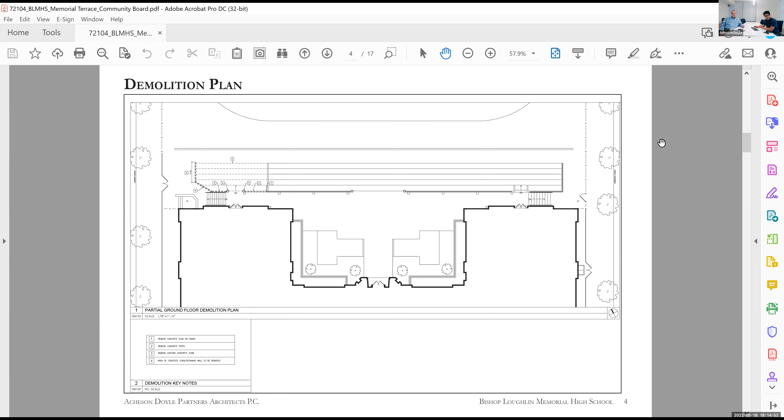Looking at the existing conditions, on your right-hand side from Clermont Avenue, you're looking at the proposed bleachers and the area in which we are proposing existing bleachers and proposing our new ramp. On your left is looking from the paving out onto Clermont Avenue. To give you an idea, to your north is Lafayette, to your left is Clermont, and to your right is Vanderbilt. We are proposing removing a portion of the existing bleachers and installing a new ramp within that area.

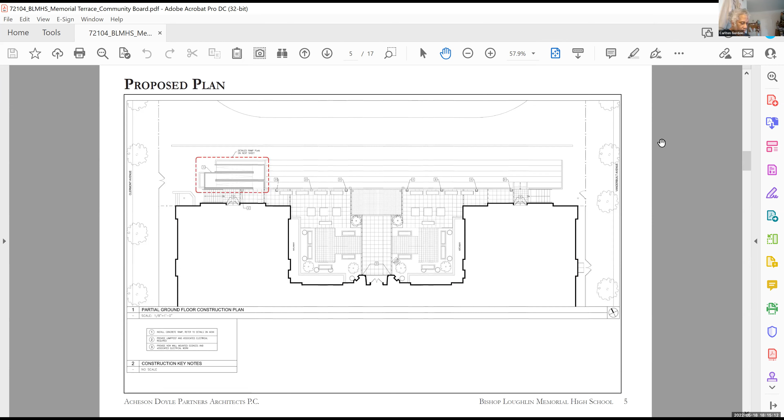The red dotted area is the only new construction, so to speak, that is visible. The paving, the upper level that you see with the benches and the paving, that's all on the ground. The ramp will be planted to make it seem more diminutive from the street view, but the work is confined to areas within the field, and it's not going to increase the constructed area.

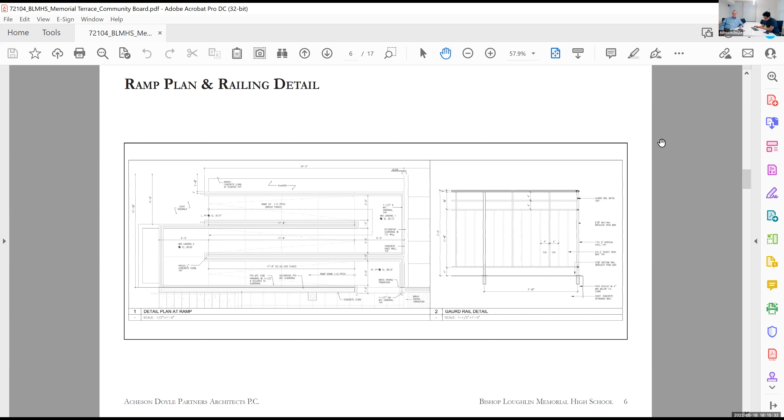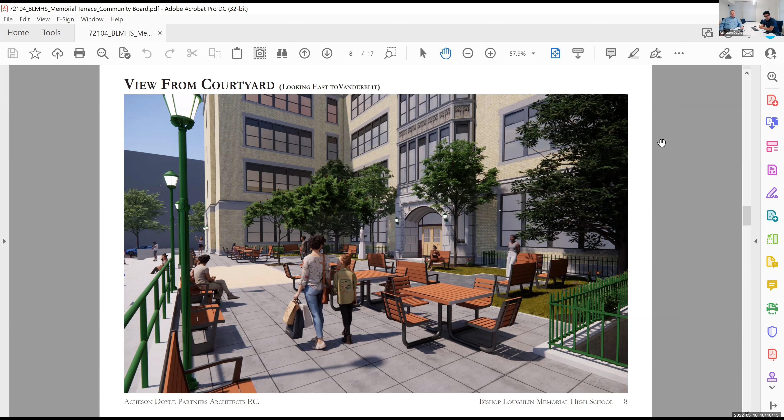This is a view coming up from the ramp, looking at the paving, which is already approved at staff level. We do have some existing lampposts that we'll show you in a bit, which we are proposing to salvage, introduce electrical to, and put new lights at the top, just for site lighting and security.

Just as an aside, the brother Dennis Cronin, who's the president of the school, is a nut about the landscaping. These trees are existing, and an arborist is coming now that the construction is getting ready to begin. They're going to trim these, feed these, and enhance the landscaping up there. It's a really nice little oasis.

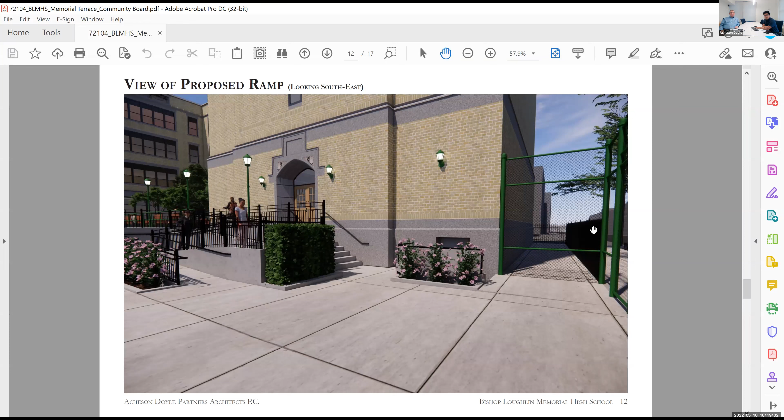So the current main entry is directly from Clermont, and that's where all the students come into the building. The students, as you probably know better than us, hang out on the athletic field and the bleachers after school and before school. So it's a meeting place, and a valuable part of the program.

This is a view from Clermont Avenue showing how our planting is going to obscure the ramp, as well as provide a more open entry sequence to the courtyard and into the building.

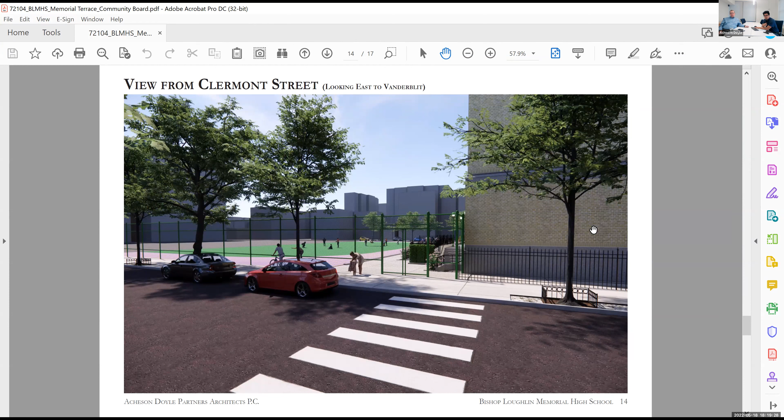We will also be introducing new wall lights at each entrance to provide site lighting for nighttime, and these lights will be connected to a photo cell, which will automatically turn on at night and turn off in the morning.

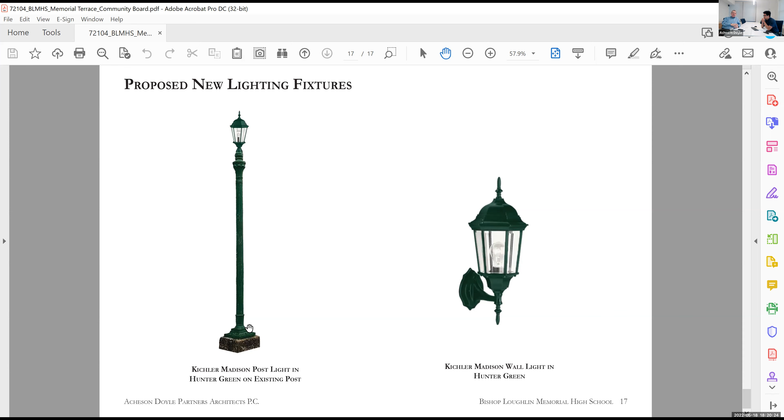Committee members, I want to point out, go back to one of the universal renderings. The school is an independent school under the original auspices of the Diocese of Brooklyn, but it doesn't function as a parochial school or get any funding from the diocese. So they work off tuition and fundraising, and that's why it was a big ticket item to do the restoration of the exterior, which has put it in very good shape, we think, and this will just further enhance it.

But the school is here to stay. They have a great student body. They're very successful, and they want to be a good part of the community, which is hopefully evidenced here.

Just as a total aside, I can tell you my father went to this school, my late father, and my mother went to Bishop McDonnell, the sister school, which is now tied into this institution through the alumni. That's who the courtyard is dedicated to, and it's been very good for their fundraising, frankly.

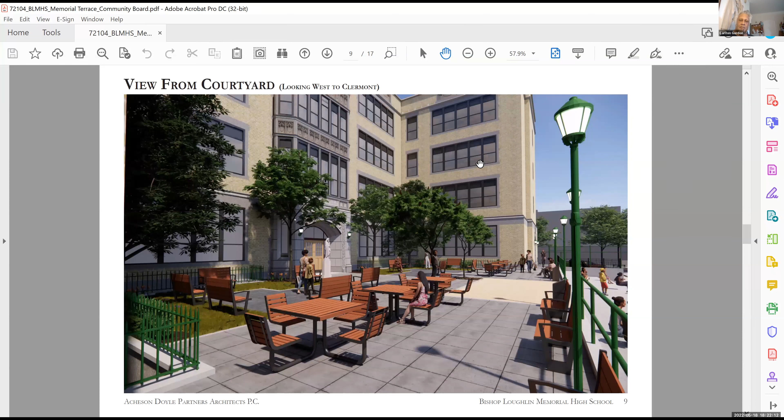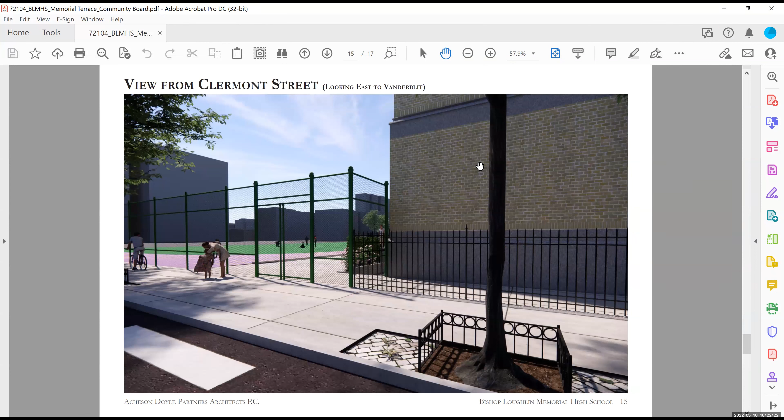Yes, can you hear me, Colton? Yes, I can hear you well. Okay. I have 3 letters, from Society for Clinton Hill, the Fort Greene Association, and also from Citizens for Responsible Neighborhood Planning. They reviewed this plan and had no objection to it.

However, their concern was the proportionality regarding the lamp to the pole, and that the lamp seemed not to comport to the character of the building, to the architectural structure. Apparently the architectural structure is late Tudor, I believe, if you look at it, and the lamp is a later period, almost a colonial sort of lamp that's out of proportion to the pole itself. Can you speak to that?

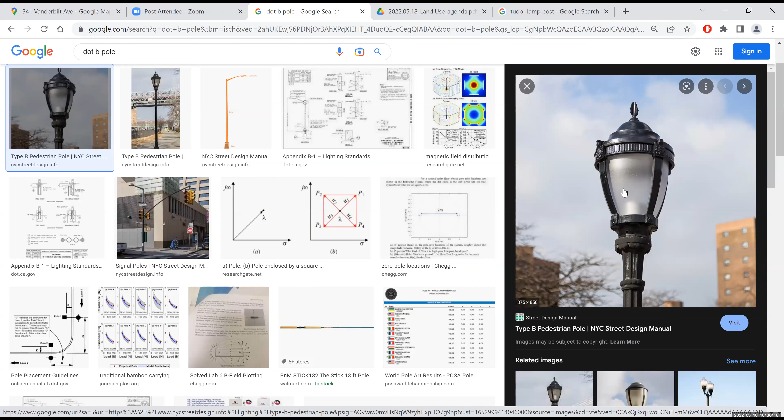Yeah, so are you open to that? Yes, we're absolutely—I know exactly what you're talking about, we're just having trouble finding it, but I know it. That's it, on the upper left-hand corner. There you got it, yeah. That's the type B pedestrian pole. Yeah, that seems to be more appropriate for something. Entirely appropriate, done deal. Great, we're happy.

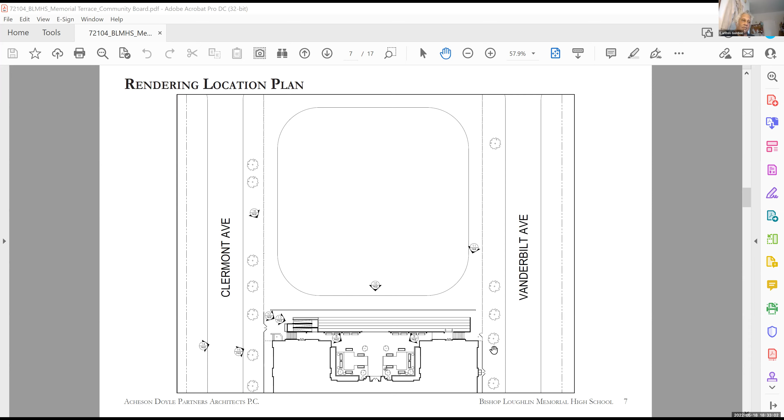Understood, thank you for the explanation. Next person on my screen with a hand up is John Doe. Alton, did you call me? Yes, go ahead, thank you.

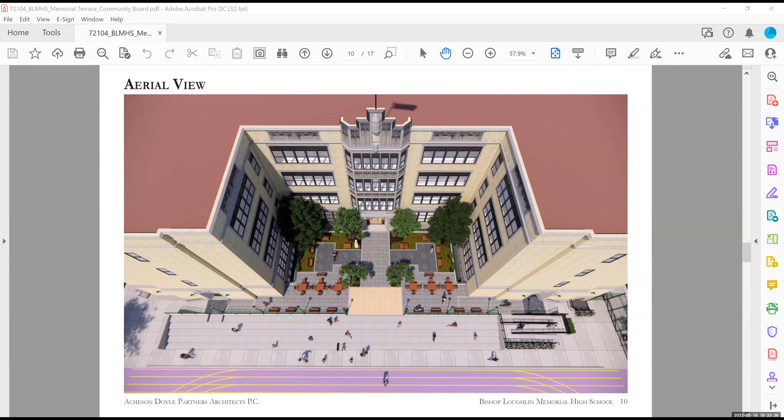My questions are not necessarily related to the appropriateness of the ramp. Could you give us the cost of that particular ramp installation? That's one question. The other question, again, is not related. Are you aware of other schools in the district that do and do not have ADA access? And I'm interested in the larger picture. This is not necessarily your responsibility, but ADA access is important. So are you working with a knowledge of what's going on in the community, or are you just focused on Bishop Loughlin?

In answer to the second question, we are focused on Bishop Loughlin here, but I'm a trustee. I've been a trustee of two other schools, one in the Bronx and one in Manhattan, independent schools that serve a less affluent community, and they both have serious handicap accessibility problems. We solved one in the Bronx, and we're literally doing the one in Manhattan right now. It's a big problem in private schools, especially underfunded ones that haven't moved towards this. But I can't speak to other private schools in the district.

Are you aware of any government funding available to make schools ADA accessible? It's not available for private schools. I looked very carefully. We also went to a number of foundations. Andy is project architect on a project in Harlem, the Mount Zion Church, where we got a grant from the Landmarks Conservancy to do a handicap assist and handicap ramp. It's not a staggering amount of money, but it was helpful.

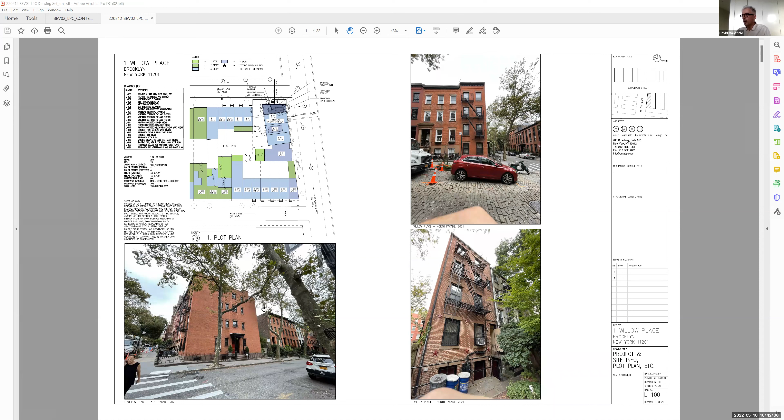The next slide shows some historical context. This is our survey. We have a photograph from 1940, a tax photograph, which shows that pretty much the windows and conditions are almost the exact same in 1980. We have some other historical photographs provided to us from landmarks that also show similar conditions; we don't know exactly when they're from, but from the cars, probably the 50s or so.

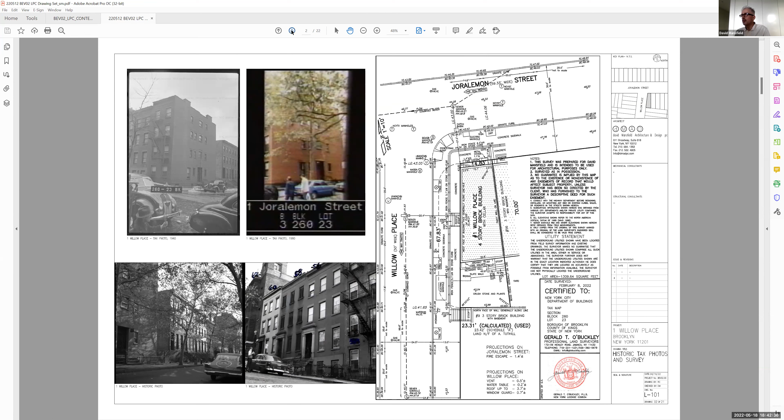And what's in question, as some of you may remember, was the work we're proposing to do at the front facade, which we're calling like the Joralemon Street front facade here. Originally, we had proposed making these windows shorter.

We've changed that based on Brooklyn Heights Association's comments, so we're keeping the openings exactly the same as before. The only work on this facade is to remove the fire escape that's no longer needed, since it'll be a single family home. You can also see here the bulkhead, which will be set back from the edge, and a railing for the roof deck. We'll see that a little bit later.

This is the existing west elevation, facing Willow Place. It shows the extent of the work we're proposing to do here. What's hatched here is removal of the existing parapet wall, with chimneys to be rebuilt, new openings, 4 vertical openings at the end here, and also blocking up of existing windows.

Also, we are planning on enlarging these openings, basically trying to reorganize and simplify, trying to improve this elevation and make it more balanced and symmetrical around the existing original front opening to the house. We believe these windows were added at some point when it was either converted to a multifamily, or basically windows were added in bathrooms, etc., at some point pre-landmarks.

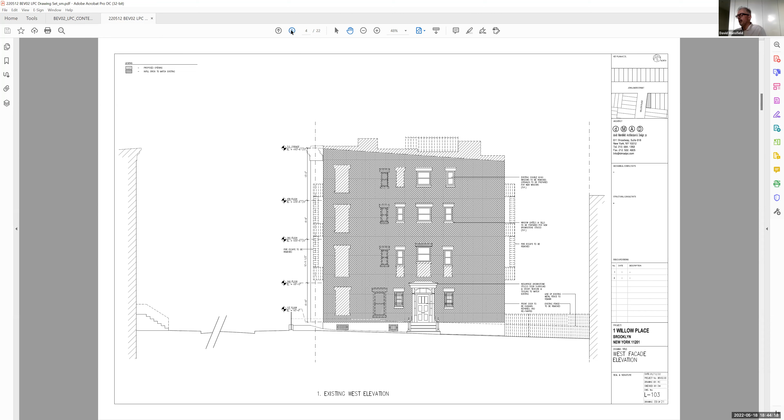This is our new proposed facade. As you'll see here, we're still indicating where the original windows were; these are our new windows. This window here now matches the one at the front, so it's the same size. In addition, Brooklyn Heights Association asked us to move these windows over somewhat, as they felt they were too close to the corner, which we also did. I think at this point they're happy with this work, and also happy with making these windows larger, removing these, and creating this revised fenestration.

There are comments you'll hear Chair Gordon share with you that they're not fully behind the idea of reworking the parapet wall into the centralized design, and we can get to that in a little bit. As you can also see here, we're adding a fence, which I'm bringing up just for discussion, not for approval, as that will be approved at staff level.

The next slide will show you the rear facade, and that's the reference point here. This is the sidewalk level. The fence will partially obscure the new windows at the back. However, as you'll see from a rendering we've done and some photographs, this new opening that's proposed - the hatch line shows the new opening - this new window is proposed.

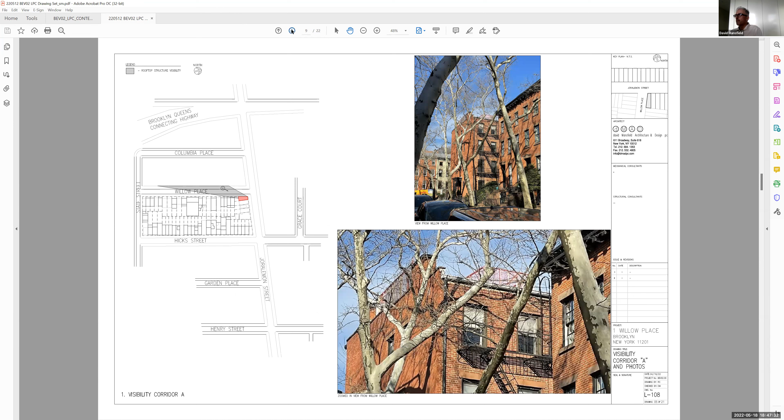Here are some more context photographs with the mock-up. What you're seeing hatched up here is a mechanical enclosure, which is on the roof. That's viewed from Willow Place. Again, a distant view with a closer up view and a zoom view.

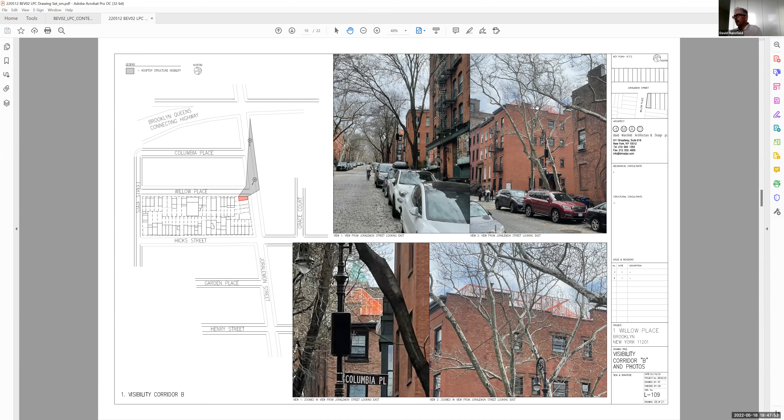This is viewed from coming up from the waterfront park, Brooklyn Bridge Park, towards the property. What you're seeing up here is partially the bulkhead and then also partially the parapet modifications.

Just for clarity's sake, coming down Joralemon Street, the subject property is at the end of this block on the left, and we're looking here at what will be visible of the bulkhead from a distance. Here is another view, view number 2, which is a little bit closer across the street, showing at a 3/4 angle that even though it's not visible from straight across the street, at a 3/4 angle you can see the bulkhead from that vantage point. This is a zoomed view of that.

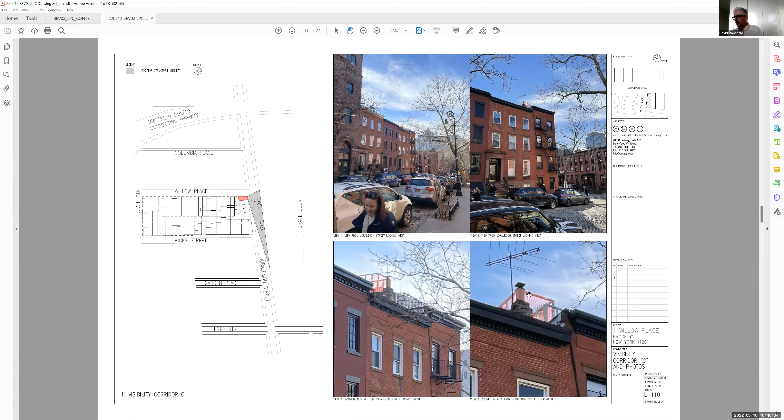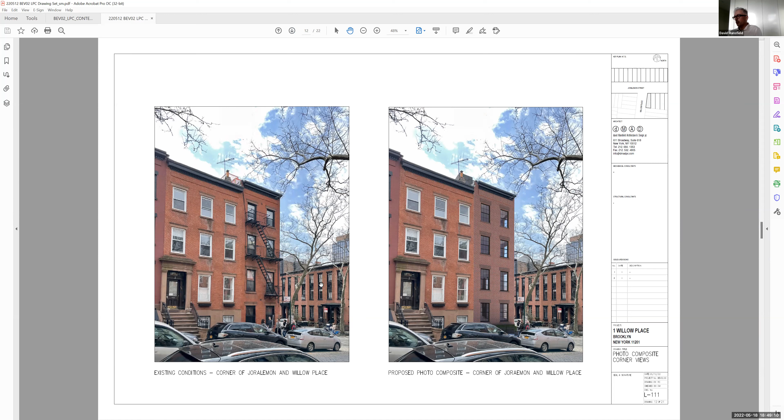As described before, this will be clad in a gray galvanized metal material that'll hopefully be very quiet and similar to what's happening with the cornice. Again, these images show the existing conditions plus the mock-up, and this here is an artistic rendering of the way the building will look after the windows have been changed, the fire escape has been removed, and the bulkhead is built.

We've also done the same thing on the corner across the street on Willow and Joralemon. Again, this is the existing building. What's visible up here is the line of the railing that we've mocked up. In the center here is the line of the parapet, as you can see over here, and then you can see that the second chimney in this rendering has been removed. Apart from that, obviously these 4 windows were added and these 4 windows were removed. So, and the porch is as is.

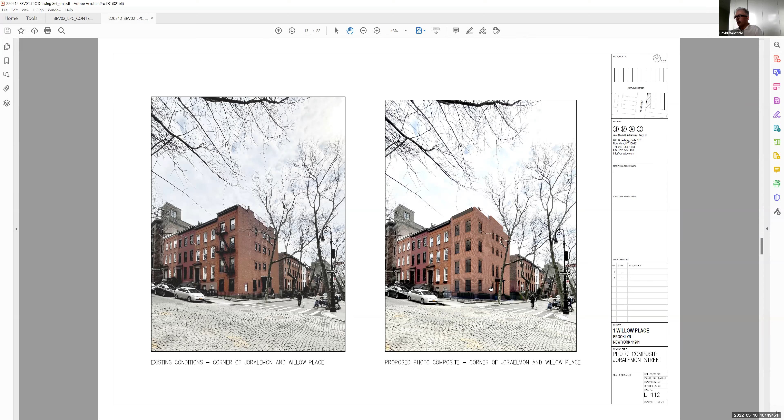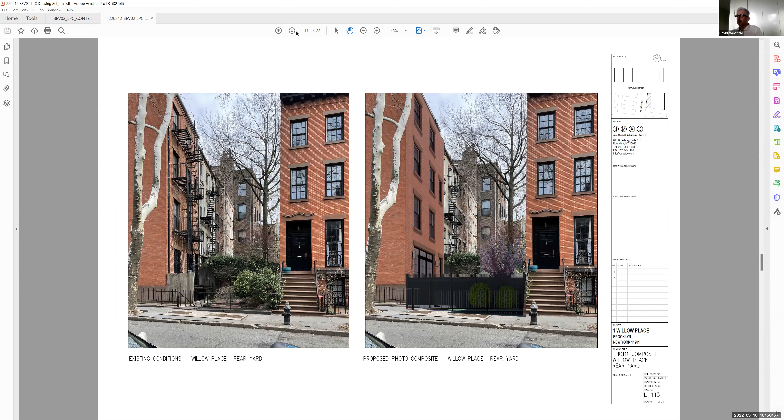In addition, here you'll see that new opening we mentioned previously with 2 new light fixtures either side. This is changed from the last time we presented, where this opening was full width - we've reduced it down to align with the outside of these 2 upper windows and just kept the existing door where it is. These are just some images showing what the rear yard looks like currently, for people who haven't had a chance to get there and look at it. Again, this is a detail of the proposed fence elevation.

Rushing through these a little bit because I'm conscious that we also have an additional part of our presentation to talk about context, which was something that was brought up previously.

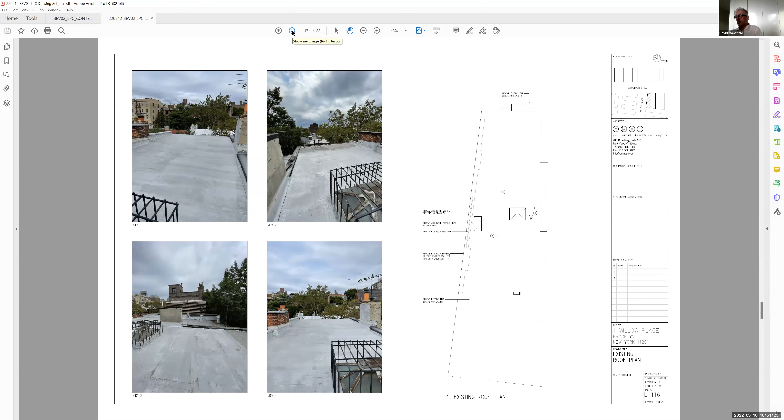Here we have photographs on the roof showing the mock-up that's currently on site, and a roof plan showing proposed new roof terrace and bulkhead, skylight, and mechanical enclosure in this area. Everything is tied up against the property line to the neighboring property to make it as least visible as possible.

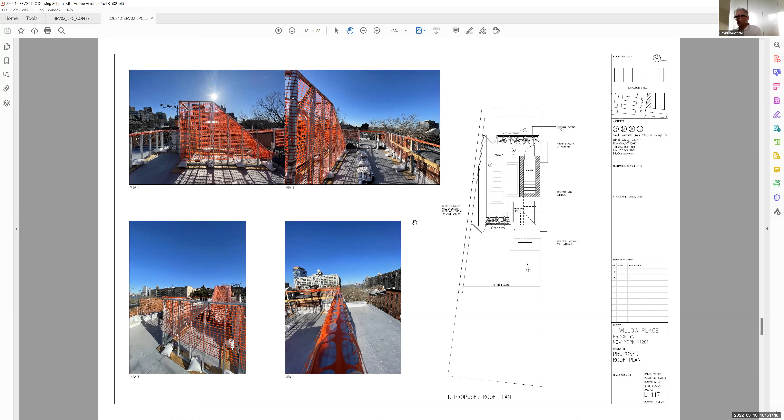But in our situation, we looked for some examples of houses that have the entrance on the long side to see how they were treated.

Our argument really around this is to try and convince, perhaps, or at least discuss the idea of making a centralized feature, as restrained as it might be, on the Willow Place facade.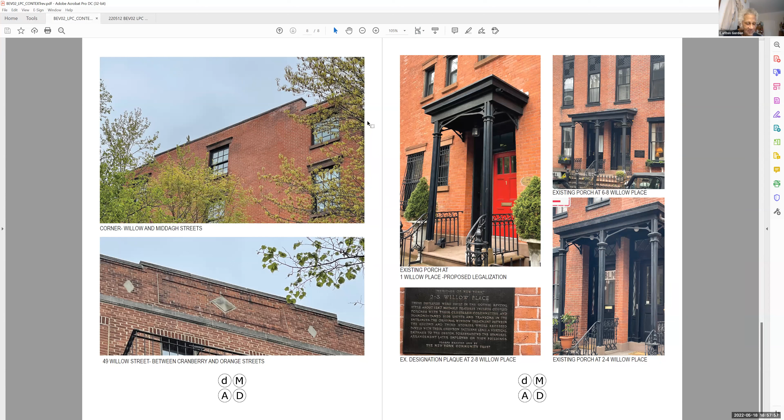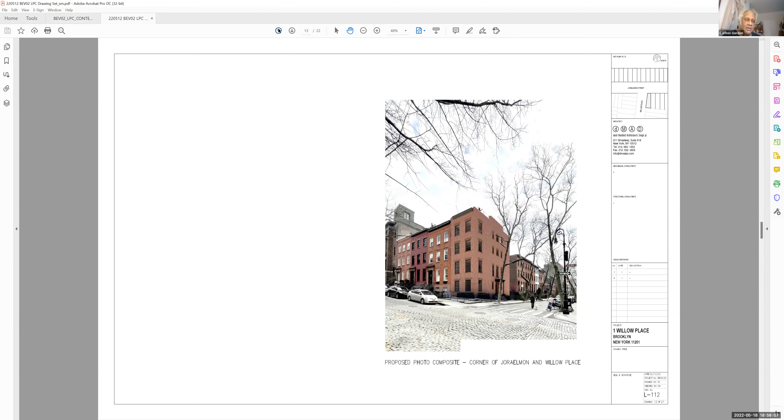Thank you, Mr. Mansfield. Okay, now what I'll do is I'll give a summary of the summary that Judy Stanton sent to the board office, and I think a couple of us, I think Daughtry got it as well. There were a few things that the Brooklyn Heights Association wanted to bring to our attention.

I guess the biggest thing they were concerned about, I'll start with what they did not like. They felt it was inappropriate, the removal of the chimney and the profile of the building. That's how they felt. They felt that could be left alone. That was one of their biggest objections.

They did approve of the legalization of the porch. They had no problem with it, and they support that effort.

It's not so much on the windows - not that the windows were a problem, it's just I think what they felt was that it should be looked at in terms of how the windows are presented. Your proposal on the windows, will it fit, let's say, the historic nature of the district? So while they did not necessarily object to the proposal on the windows, they felt at the same time that it might not fit in that well.

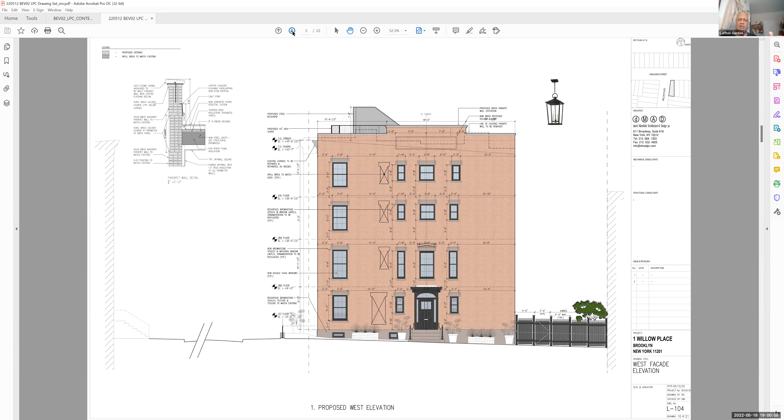Also as part of the windows, there was a fourth thing, but it's more of a suggestion. What they're suggesting is keep in mind, especially for the rear of the building, that it's not just going to be facing into the donut, but apparently this rear of Willow Place is going to be facing directly onto another building right across the way. What they suggested is that your client keep in mind that they will not have as much privacy at the rear, since it's going to be near this other building across the way.

So that's my summary - I hope I didn't botch it, but this was what Judy Stanton had sent to us. Okay, given that, do we have any other questions or comments from committee members or board members?

On this application - can I just jump in? I'm sorry, Chair Gordon, I don't know if it's appropriate, but the rear window does not directly face another building. It faces the end gable facade of the first building on Willow Place, but there are no windows in it.

Their comment about that was the rear is highly visible. It's not part of a hidden donut in a typical block configuration. We think the owner would actually want the privacy of more modest windows. The rendering we showed shows how visible it is from the street - it's a diagonal view, not a direct view.

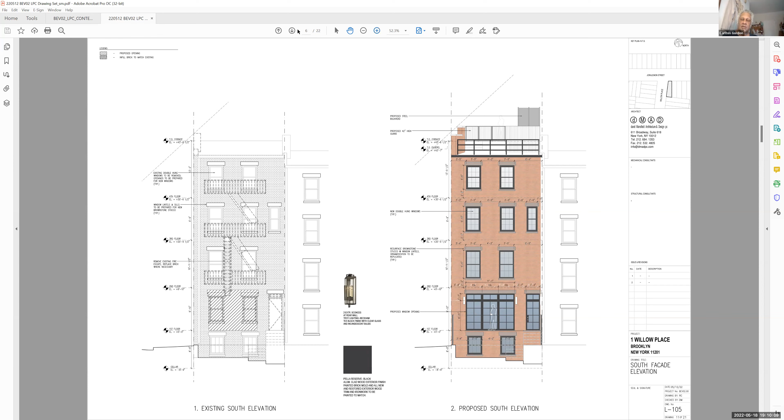Are there any other questions or comments from committee members, board members? Hearing none, Mr. Lee has made a motion to approve. Do I have a second? Second from Daughtry Christophin.

Mr. Lee, was that, I apologize for the construction noise, was that a motion to approve as presented? Yes. Okay.

My comment, Mr. Mansfield, you mentioned you would just have a discussion with the Brooklyn Heights Association. Are you suggesting to accept it without consultation with the Brooklyn Heights Association, or with consultation with them? Well, from what I understand, it wasn't really a requirement other than the windows, which they have gone back and forth with, the same windows. This current window he's provided was based on what they recommended before.

So what are we turning this around to? Let me turn it around perhaps. Mr. Lee, would you be willing to accept what Mr. Flournoy is requesting as a friendly amendment to your motion? If it's a friendly amendment, sure.